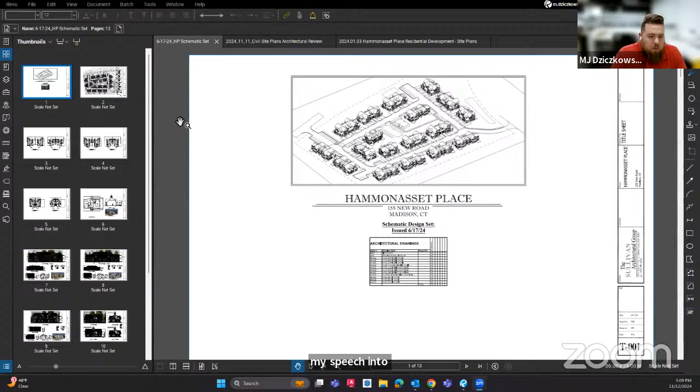As Marjorie has said, we are here to discuss 155 New Road in Madison, Connecticut. Tonight I would like to break down my speech into two sections: I'm going to start with the project scope and then go into the project aesthetic. To begin, this project consists of 18 two-story residential buildings and one one-story amenity clubhouse building.

As you can see, there are 9 residential buildings on each parcel, evenly spaced throughout the property. Each building is wood framed and will be set on a concrete slab-on-grade foundation.

As you can see in the site plan, there are different colored buildings. These colors correlate to a different scheme, which I will get to a little bit later when we are talking about the aesthetic.

The buildings are arranged on both sides of a vehicular loop to create a traditional neighborhood feel, with driveways in front of each building. There are 4 units in each of the 18 buildings, where the second floor stacks over the first floor, and the second floor is accessed by a walk-up stair from the grade level.

There are 2 unit types throughout the project: a 1-bedroom with a den, and a 2-bedroom with a den. We have arranged these to derive 3 different building types, each with their own aesthetic.

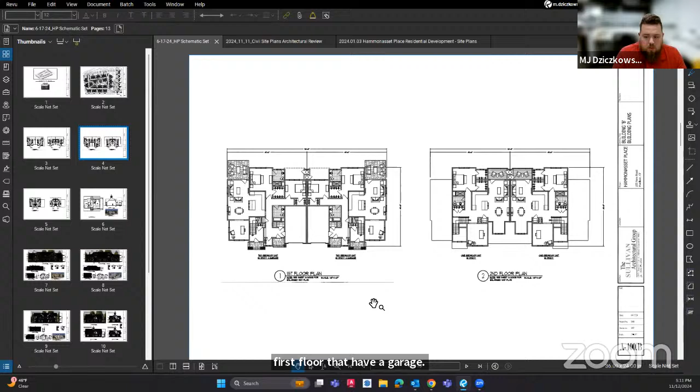And the last building type is building type C. This building consists of 4 one-bedroom units with a den, and they're paired. Each pair is stacked over one another with the garage on the ground floor.

With all of these buildings, the project is going to consist of 44 one-bedrooms and 28 two-bedrooms, and that will bring us to a total of 72 units with 100 bedrooms being offered.

The logic to the arrangement of these unit types and creating these buildings is to provide a variety of options to offer the tenants with different needs. This way, both one-bedroom and two-bedroom units are offered on the first floor with a garage, or offered on the second floor, which gives more privacy and a view.

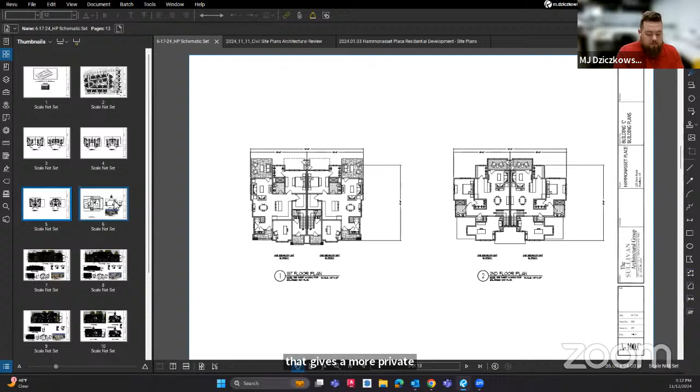And now I would like to get into the aesthetic of the buildings. The project has a New England coastal aesthetic using clapboard and shingle siding with various gabled roofs, with one- and two-story eaves to create a variety of scale and proportion, individualizing each building.

Building type A, as you can see on your screen right now, consists of clapboard siding with 2 color varieties, where 3 buildings will consist of this wheat, which is depicted, and 4 of the buildings will be this warm green color. Each color will have cream windows and trims and the weathered wood roof shingle. Each of the 7 buildings will have a dark brown shutter and dark brown entry doors and garage doors.

Each of these buildings also have, on the front and side elevation, a one-story bay with a dark brown standing seam roof. To get into the units, each entry door is recessed either under the second story, as you can see here, or under a roof line supported by trimmed columns.

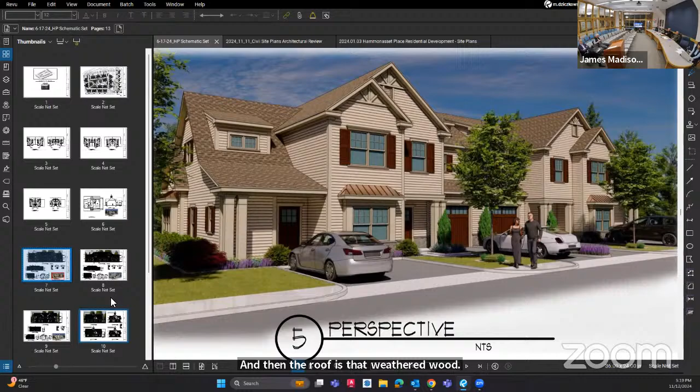So this particular color that we see here is not necessarily indicative of the cream? Yeah, I think this color is a bit more - the render could have a slight brightness to it that can make it look more like it's white, depending on how the sun hits it.

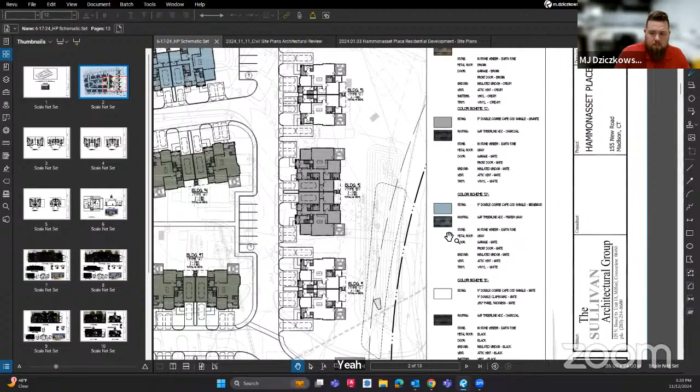Well, my comment is simply that the other color schemes, if I remember correctly, this is the only one with brown, right? Yes, so we have cream, green, gray, blue, and white. So the other 3 seem quite crisp to me and very pleasing. This one seems a bit on the dull side, and I wonder whether you might want to consider something to liven it up a bit.

Okay, like the others have white, and this has no white really, and white usually gives a crispness to the facades. And I worry that this looks dull. So, just a couple of quick observations.

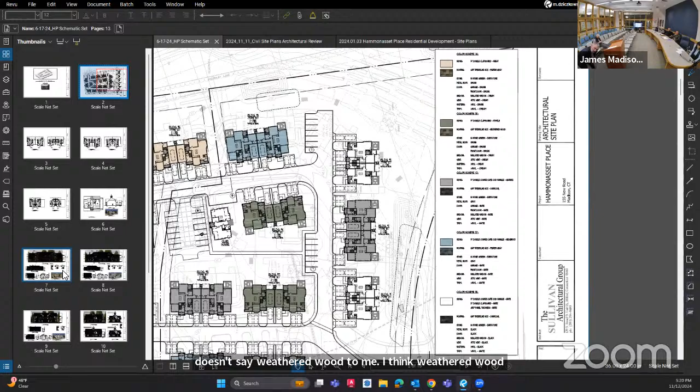I think the rendering, the 3-dimensional drawing you showed us, doesn't say weathered wood to me. I think weathered wood looks a lot nicer than that roof color on your rendering. Part of it's probably the way it's coming through on this particular monitor, because every screen will depict these things differently.

So if that's weathered wood, that will give you a bit of contrast to the others. It just looks like a dated color scheme to me, like that 1970s shingle, right? Correct, that's what I thought too. Which we don't use anymore typically. But if you're gonna use it, I'd rather see it blend.

This is Alex, just to echo what Ron just said, I'm glad you brought that up because that was my initial impression as well. And then it's only compounded - I think there's a bit of stone veneer on the front, if I'm not mistaken.

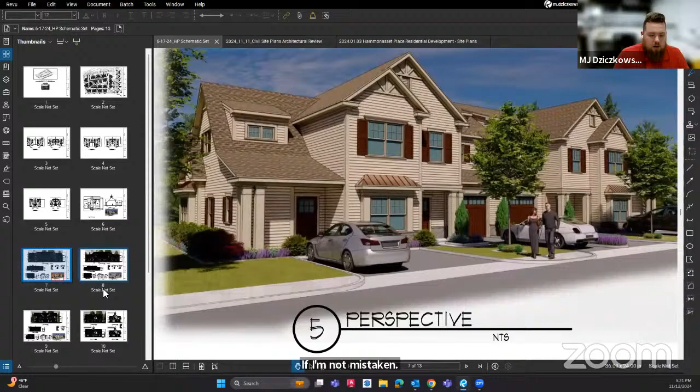Yes, there would be - I think we could see it in these elevations. So yeah, the bays will have some stone to them. And take this as an opinion, but it reads very 70s, and using stone that's not indigenous to the area always reminds me of something you'd see in Scottsdale, something that looks like it belongs in the desert but not really in a little coastal town. And I think the veneer gets echoed in some of the other units as well.

So I did a Google search to see what other towns have used along the shoreline, and it seems like a more cheerful granite or something more in keeping with what you'd find in your yard might tie this in and give it a sense of belonging. But I completely agree with Ron - it could just be the monitor, but it reads as very dark and 70s-ish, whereas the others read as coastal.

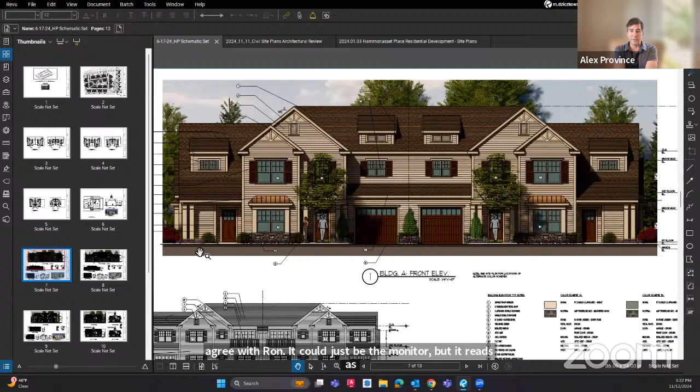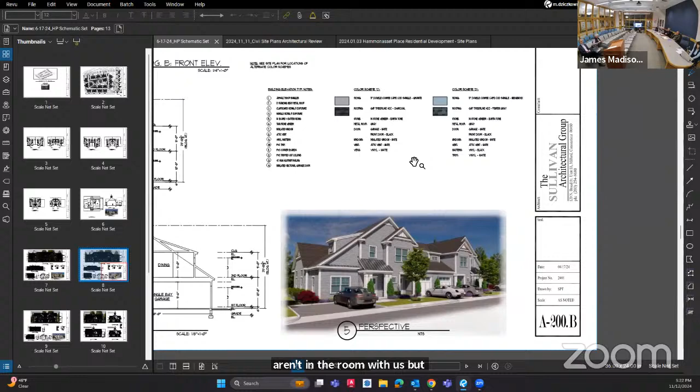I think the stone veneers are all over the map, and I don't know if you've specified anything. Typically what we'd like to do is see samples of all the materials, because then none of us are really guessing at the color, or what the lighting does to it in here. So I'm not saying we need you to do that necessarily, we'll discuss that probably at the end, but I think that would make the choices really clear where everybody can say yeah, that's great, or no, that shouldn't have been done. So anyway, one of the things John Cunningham just said to me, maybe you can recap it for us.

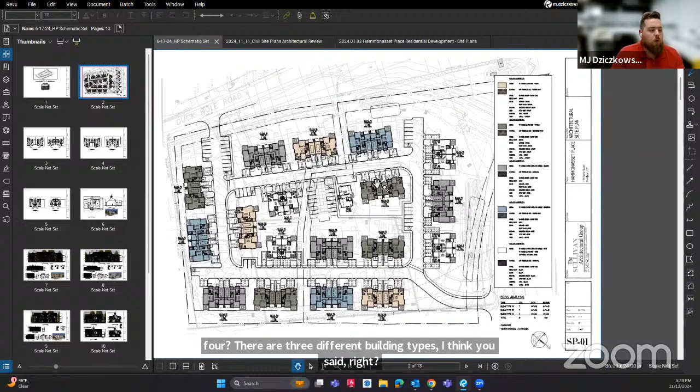Are there 4 color schemes in the entire complex? There are 3 different building types, I think you said, right? So 3 different building types, 5 different color schemes. Which building type do you have 2 color schemes for? Type A, okay, is that the one we just looked at? Yes. So type A is the cream and the green. Type B will be a gray or a light blue. And then type C is just white.

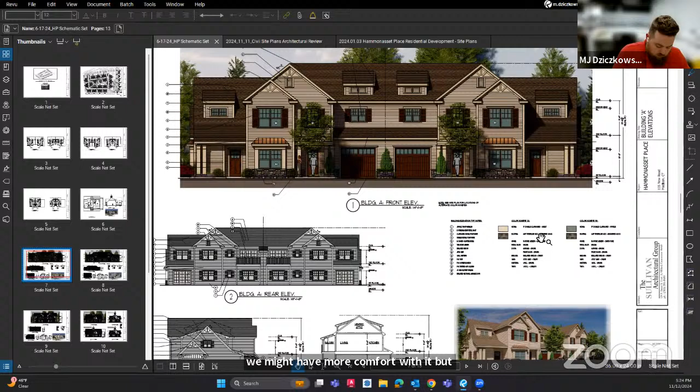So the cream or green on that type A building, looks like you don't have it rendered in the green, is that right? Yes, we only have it rendered as cream. But it's the cream that's the problem. I think if we could see that material sample we might have more comfort with it, but it just looks dated. Nowadays they'll use the term retro. Retro, well hardly, some retro. But I think overall the design of the building is fine. I think the other ones are a bit more creative, but I think this is okay.

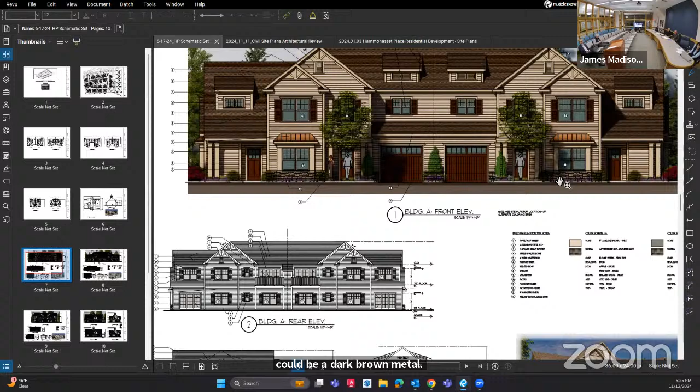Hey Matt, I guess the only thing I'd say along the lines of the visual palette here is that there's brown garage doors and then there's brown garage doors, and it really matters what door it is and what it actually looks like. So those are all just questions. The copper is rendered on that 2-dimensional elevation there, the metal roof looks like copper, is that the idea, it'll be a copper color painted metal roof? I believe so, let's see. Some of the doors, yeah, so we say brown, but right now it's rendered as copper, it could be a dark brown metal. I'm not asking you to change it, I actually think it's cheery compared to all the other brown, in my opinion. I don't think it's necessarily a bad thing, I just wondered if that was accurate in terms of the visual on it.

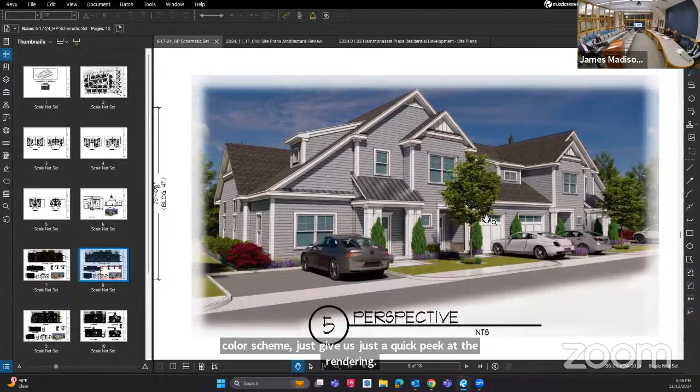Okay, why don't we just quickly run through the other buildings' color schemes, just give us a quick peek at the rendering. So here's type B. So this type would be in the gray and the light blue. And so these have the white trim, white windows, white doors, so it's a little more of a pop, and then it would have a dark gray roof. And then blue, is it just, I see the windows look kind of blue, or is that just a rendering technique for the glass?

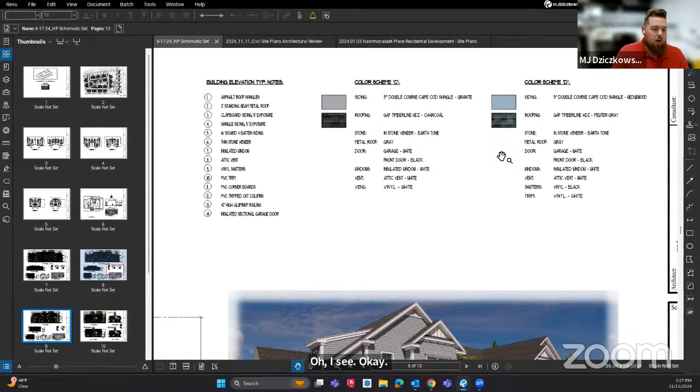It's on the screen, this looks gray to me. Oh, the siding? Yeah, oh sorry. So the siding is gray, and then there will be a light blue siding. Oh, so are there 2 color schemes for this building type? Yes. Oh, so that's depicted up here, okay, a gray and then a blue. And then like the previous building, only depicted right now is the gray.

Okay, and what's the specified roof on that? It looks like weathered wood to me, but maybe you mentioned. So the specified would be like a pewter gray, like a dark gray. I guess we're going to have to see samples. Yeah, sometimes when you do the gray roof with the gray building you get just too grayed out, in my opinion. I actually like the way that roof contrasts and emphasizes all the nice building forms you've done, because it contrasts nicely with the siding color in that drawing.

Okay, one thing to point out, this is Alex here, Matt, curious to get your architectural opinion. This house does not have shutters, whereas the brown one before had the plastic shutters that wouldn't cover the window if it were closed, which is always an annoyance to me. Does anyone else have a strong opinion? Whereas this seems so pleasing without shutters, is anyone else sensitive to that? I think it looks fine to me with shutters or without shutters, but if you could just pan us up to your 2D elevation, Michael.

Yeah, I think that's fine. The building has some nice form to it and it doesn't need the shutters. In fact, shutters in a lot of places on this building might look crowded. No, I'm saying the opposite - it looks good without shutters. Is there a way to remove shutters altogether? If they're not going to actually cover the windows, even in theory, that to me always looks cheap.

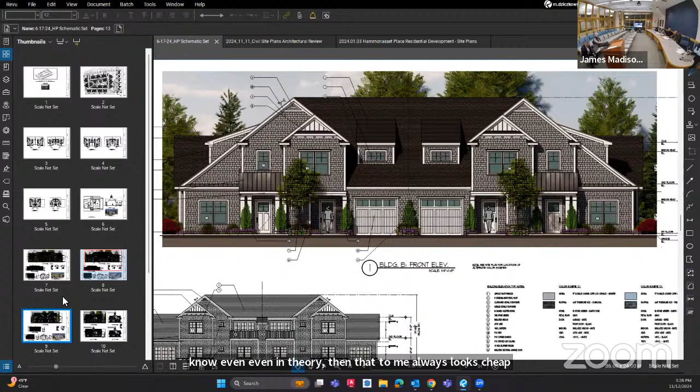This unit does not have shutters and looks terrific. Yeah, I guess we'd have to go back to look at that. Can we go back to the brown one and take a quick look?

It's not... I think it's very plain. You've got those small windows in the middle and those are really kind of lost there without some dressing, only 4 windows. But personally, I don't think that the shutters either make or break the building.

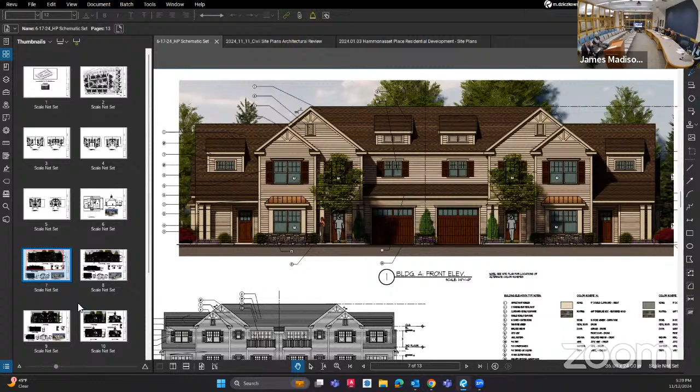I still think it's the color scheme that's the problem. Yeah, I would say that's probably more the thing that you notice. So it sounds like that building needs to be reworked, possibly with the color scheme, or if he can show us the green scheme, maybe we get rid of this color scheme altogether, if they would be amenable to that.

Okay, and then here is building type C. Looks great. So that looks like almost the same building we just saw, but different color, or am I wrong about that? I guess I'm wrong, it's different. But it's actually very nice, I think it's great.

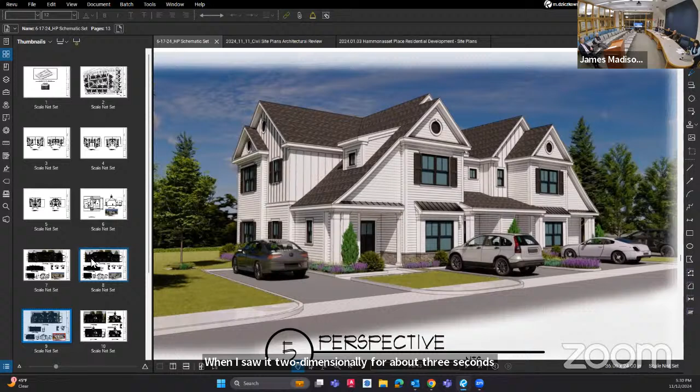This building's a little more compact, strictly the 1-bedroom units, so it's not as wide as type A and B. Well, I think with white you can get away with mixing that vertical board and batten and the shingle, and when I saw it 2-dimensionally for about 3 seconds on my screen this week, it looked good. I thought it was pretty successful. I like the contrast that roof gives to the white - you'll have contrast there with white, obviously.

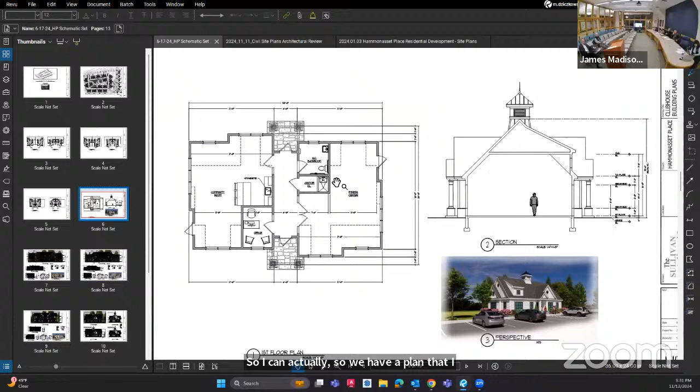Okay, and then lastly, this is the clubhouse. So the clubhouse will have a similar aesthetic to building type C. What's in the clubhouse, what do you imagine going in there? So we have a plan I didn't hit on - a community room, then a fitness center, an office space, and then a bathroom for the clubhouse itself.

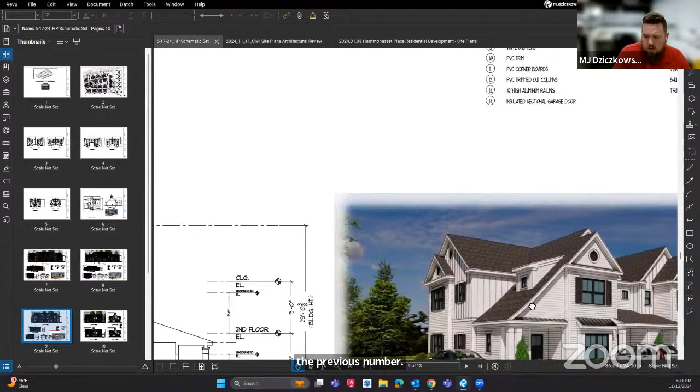And then here's another render. Well, it's a different color. Yes, this roof looks like it does not look as dark as the other one. But it would be black like the previous render. Was the other rendering white as well? No, the other clubhouse - oh, sorry.

Yeah, that one. That's the same white? Yes. It's got a shingle side - shake side. So would it have shake siding or not? Does it not? Oh, it does not. I'm sorry about that.

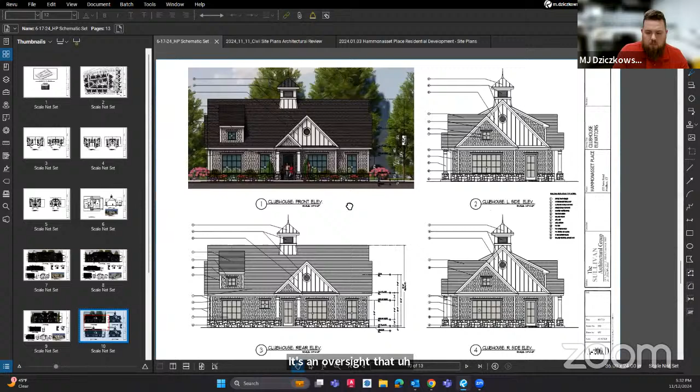That I am not aware of. I'd have to... my assumption is that what is in the elevation is the intent, and it's an oversight that was not matched in the rendering. Sorry about that. The three-dimensional rendering was all that.

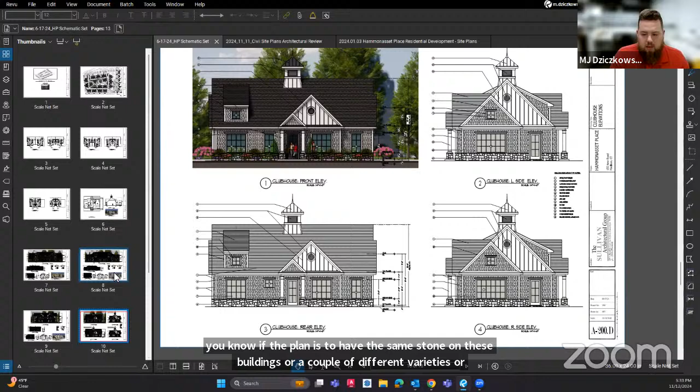Okay, just back to the stone - do you know if the plan is to have the same stone on these buildings, or a couple of different varieties? I think when we laid it out, we have them labeled as earth tones. My thought is that it's all the same, but like you said, it can be discussed to kind of match a granite with this gray and blue scheme instead of the earth tone, and kind of bring it back to Madison as brought up by another member of the board. So I feel that could be a discussion to change up the stone.

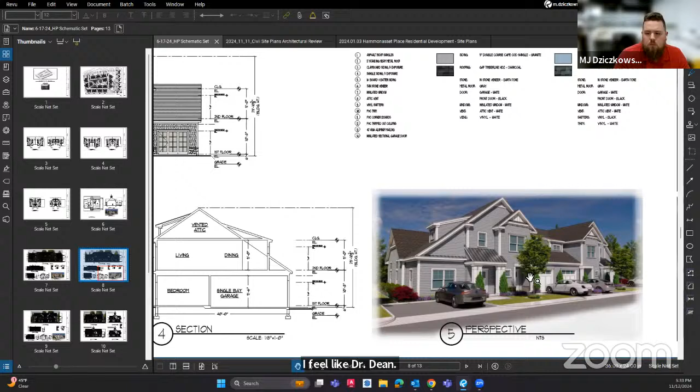These are for sale units, right? Is this a condo thing? I thought these were all going to be rental. Mr. DeGennaro may be able to better answer that. I'm not aware of for-sale plans. The plan is to rent them.

After we got our first approval, we probably had 15 to 20 people from Madison asking for a rental type community. Most of them were older people who wanted to maybe sell their house in Madison but still have some connection and still live here.

The only reason I ask is I know that what looks like sort of a baby blue, powder blue on my screen - none of my developer clients would ever let me use that, because it's hard to sell. So that's why I asked, but I'm not saying I don't like it.

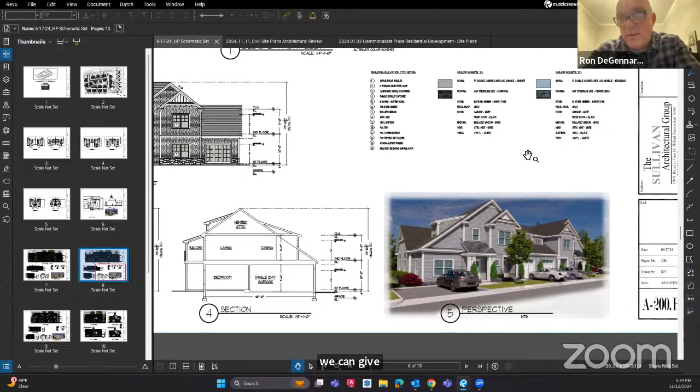Again, if we had that material in front of us, we could give you better feedback. As a builder, of course, I wanted to make them all the same color, but the architects talked me out of it. Good for them. Yeah, I like it, I like it.

Looks like, I think for a rental community, it's perhaps a better way to go. I think it makes it more lively. Are we going to move on to the site plan?

Before we leave this - I don't want to belabor it, Michael - could we just go back to your initial site plan with the color coding? So along the road, is that new road to the left or bottom, is that the way it goes? Where's New Road?

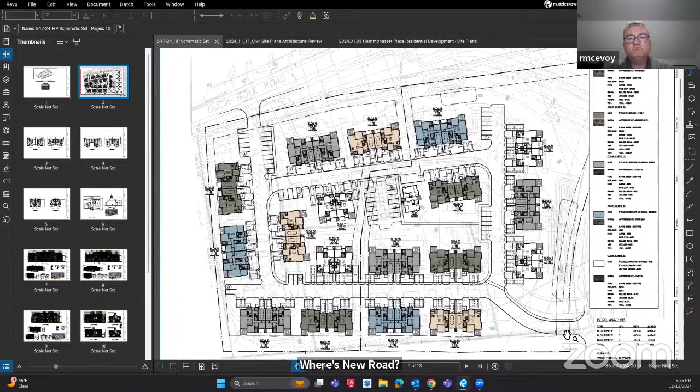New Road is to the right. Where is it? Oh, I see, Duck Hole is at top. Duck Hole is on the top. Is north left? If there was a north arrow here that I could see, there probably is one - it would be pointing to the left. Or sort of, okay, whatever. So anyway, Duck Hole is up at top.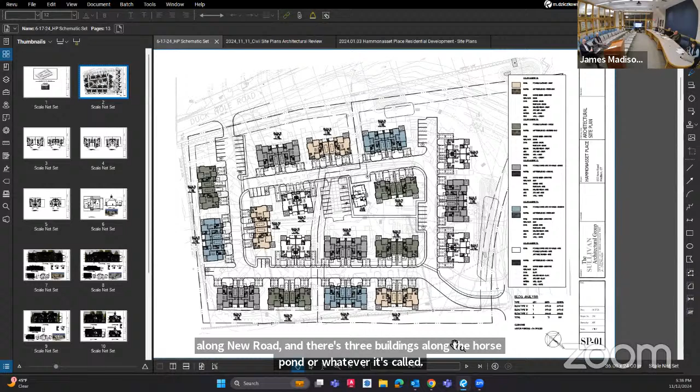Okay, New Road. So there are 3 buildings along New Road and 3 buildings along Horse Pond, or whatever it's called. And so the colors of those buildings - are all 6 of them different? Can you just walk us through what the colors are for those 6 buildings, so people can drive by?

So this is building 3, it's a type C, so it will be white. This building is a type B, so it has the gray or blue option - we chose this building to be gray. And then this is another type C, so this building will be white. So white, gray, white, that's nice. And then when we come down here, we have a type A. When we get to this road, we have a type A on the inside and a type A on the bottom.

So you don't need to - I'm sorry to interrupt, but unfortunately we're on a time limit tonight. If you could just walk us through the stuff that's along the public way on top of the site plan. Oh, sorry, yes. Those 3, that's what people are really going to see in town, so that's what we're sort of supposed to be focused on from our perspective.

So this building is a type B, so this will be the light blue. Next to that is a type A, which will be the cream. And then next to that is another type B, so it will be gray.

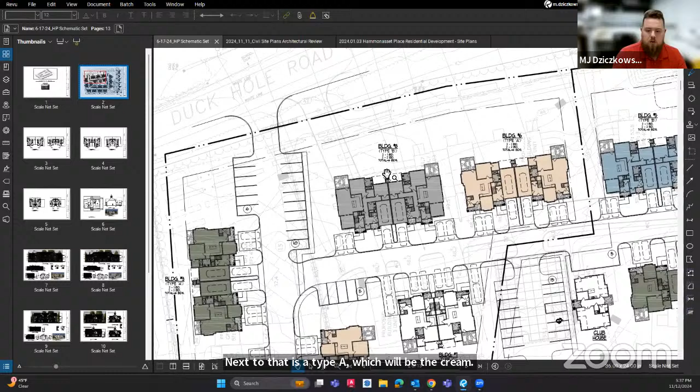So that cream could go green, right? Then we'd have blue, green, gray - that might be a little much. It could go green, then I would probably change this building to cream. Anybody have any strong opinions about what this looks like on the road?

Definitely - okay, go ahead, please speak. Well, I agree with you completely. I think blue, cream - unless it gets changed, which I hope it does - blue, cream, or green and gray is pretty heavy all together. I think the whiter colors look more elegant, in my opinion.

This is going to be, to Matt's point, where people on Facebook and in town, once this gets going, are going to start noticing, and their ears will perk up and everyone will be interested. So to Matt's point, I think New Road and Duck Hole Road need to really look terrific because that's what the public's going to see.

Thanks for the geography there, Alex. I needed it, it's a weird name. I still call it Horse Pond.

As this is preliminary, we can worry about this at some other time, as long as the color schemes of each building is acceptable. Juggling the colors and where they go is just sort of... I just don't think the blue is going to play well on that primary corner where everybody's going to see it.

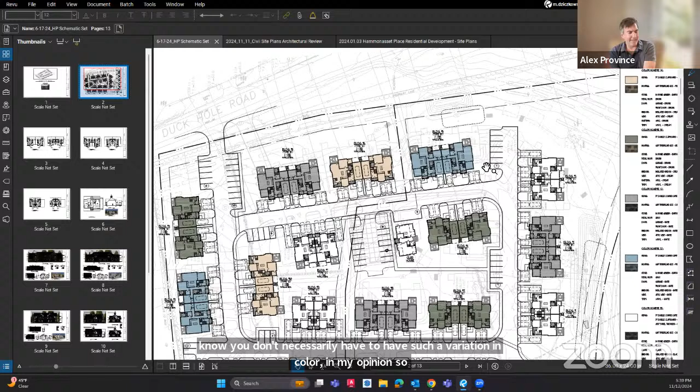I think John hit the nail on the head. Four colors in the grays and the whites. Okay, I don't have anything else. No, let's get let's move on to the site.

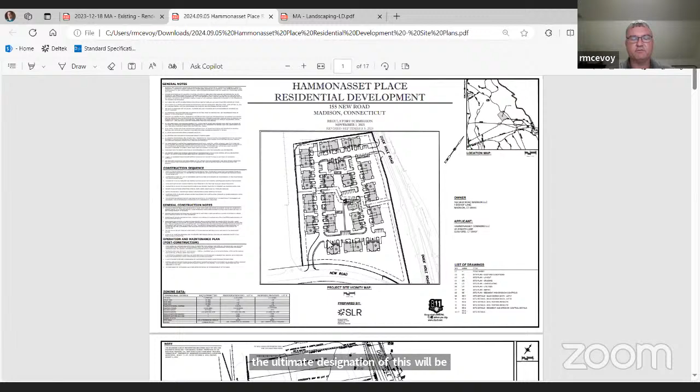And just a little more detail in the layout. We do have sufficient parking for each building, either in the form of a garage space or surface spaces immediately adjacent to the building. And there are a number of visitor spaces as well, some concentrated around the clubhouse, some located in clusters of 3, 4, or 5 surface spaces throughout the site.

In terms of site utilities, not going into any significant detail, but these will all be on septic systems. As you're all aware, there's no sewers in Madison, and the soil testing proved to be very favorable, located along the eastern side of the property. So most of the leaching fields will be directed towards the east side of the site.

Stormwater will be collected and conveyed and brought to an underground stormwater basin located near the clubhouse, underneath the parking lot for the clubhouse. There will be 2 smaller surface ponds located in the south and southeast corner of the site. The southeast corner will be the ultimate discharge, which is also the lowest portion of the property.

In terms of the road grades themselves, this is relatively flat. Most of the driveway grades or road grades as you go around this will be 3% or less, so it will have a relatively flat feel and not a significant amount of topography. The only area with some grade change is in the northern portion, where we're up at roughly 5%.

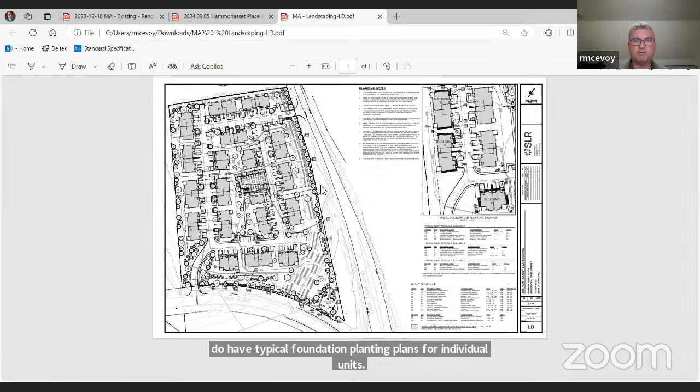Along Duck Hole Road to the east, we have a series of evergreen buffer plantings located along the property line. There is a fair amount of vegetation right now within a very large right-of-way on the west side of Duck Hole Road. There are some overhead utilities, but there's a pretty wide swath of state right-of-way between the edge of pavement and the property line itself, so that buffer will be maintained. There's no intent to cut down any trees within the Duck Hole Road right-of-way, with the exception of our emergency access drive.

But largely, regarding our leaching fields, we are proposing evergreen buffer plantings along Duck Hole. Similarly, along the commercial property to the west, we do have buffer plantings as well, generally evergreen in nature. And along the south side, we have a series of more shade trees, not the evergreen buffer that we had on Duck Hole Road. But again, the intent of this layout is to provide adequate ornamental and shade trees within the internal roadway network, and screening along the east and west sides of the property, with a variety of shade trees along New Road itself.

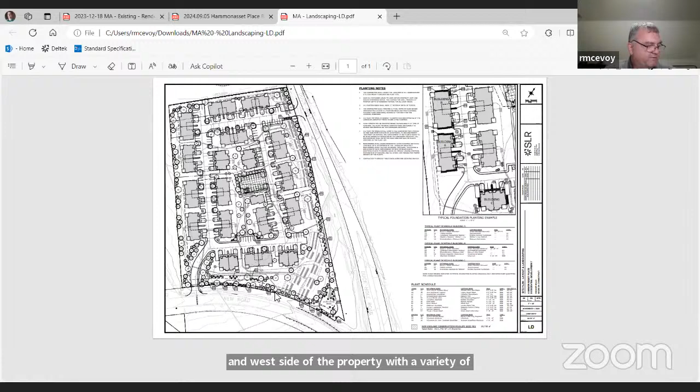I do have Sheba from my office, who is a landscape designer, and she could go into any more detail and answer any questions you have about our species selection, if you do have any questions regarding that.

No, I looked at the plant list. I think the plant list for the entire site looks fine to me. I have a couple little suggestions I made, I went through it today. I see you have straight Clethra alnifolia in your foundation plantings. I would just suggest maybe going to one of the dwarf varieties, like 16 Candles, or one of the smaller varieties. I think you'll have a much easier time than trying to contain straight Clethra. Sure, not a big change. A really good suggestion, actually.

Also, even though I'm a big fan of sugar maple, they're having a real hard time down here — they need cold winters. So I see you have red maple on the plan. Maybe just move all the maples to red maple and delete the sugar maple. Sure, which I think long-term might be better — they're hardier.

Everything else looked fine, I went through all the plants. Majority of them are native. You have a range of evergreen stuff along Horse Pond, which I like also. I worked on the property across the street from here — it's a lot of the same material I'm using over at the new office building. Okay, great, awesome, thank you.

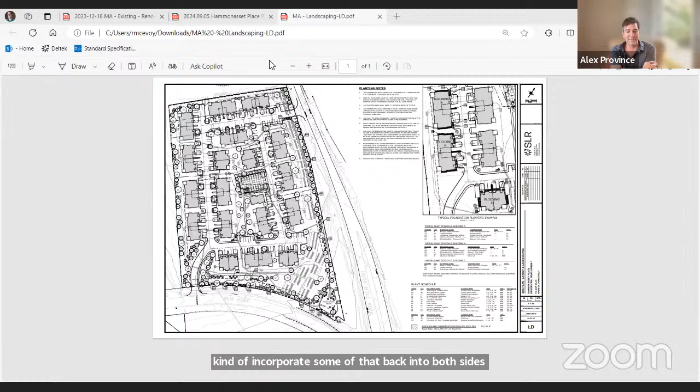John, can I follow up on that? Remember across the street, historically, there was always — you can specify just a lot of cedar. I don't know which varietal you would know, but it seemed like since I was here as a kid, there's always been like a specific kind of cedar that's grown in these fields. Does it make sense to incorporate some of that back into both sides? There is red cedar — they have red cedar on their landscape plan. When I asked about the landscape plan, I did not see one, so I missed out on it, my mistake. Eastern red cedar — yeah, Eastern red cedar is what we're using across the street. It's native to this region, and they have it incorporated in their landscape plan, which I think is a good choice.

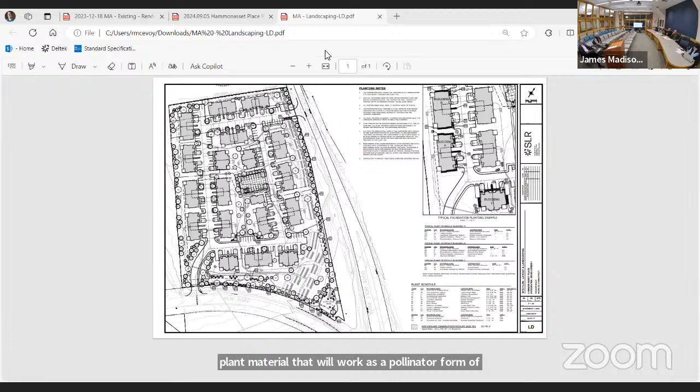That's great. And across the street, you would put in a pollinator meadow. Now we crossed that out from across the street. You crossed it out? Yeah. Oh good, I'm just fooling you. No, it was good — all of their stuff is fine on the plan, and they have plant material that will work as a pollinator form of shrub material. I didn't really look at their perennial list, but I'm sure it's going to be fine. Okay, thank you John, okay.

So you are kidding. Yeah.

I have one observation, I don't know how other members see this. In your upgrade from 42 units to 70 some units, that's quite a significant increase. And while that's a noble effort to include more housing units in Madison, I think it's crammed this site full of hardscape and houses, and really leaves almost no green space within the development. It's only on the outside where you see some green space, and that's not a whole lot either for people to use and be comfortable with.

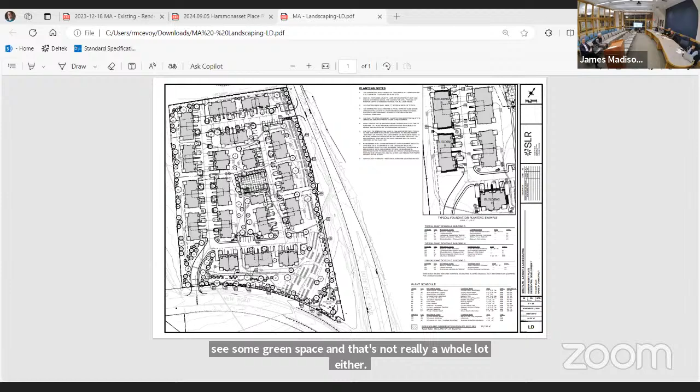I think once you're in here, because this is going to be a one-way 360-degree road, right? Not two ways? It'll be two ways. Okay, well then that makes it even wider. So the cars, garages, entryways, and buildings, even though they're quite nicely designed, I think it'll all be in your face in a way if you live there. I'm just concerned that there are too many buildings jammed in. I don't know how other people feel about it.

It's a good point, I think there's a lot of density there. If you're able to zoom in on that site plan we're looking at right now, it might help us get a better feel for it.

So where the backs of those two buildings in the center are facing each other, that looks like it's probably 100 feet between those two buildings. Yeah, this is close to 100. You're probably more like 50, 40 to 50 further to the left on the south side.

Well, the entrance side is where it can get a little congested. So how deep are your parking spots in front of your garage doors? Just to give us a sense. We have a minimum of 22 feet between the garage face and the actual driveway.

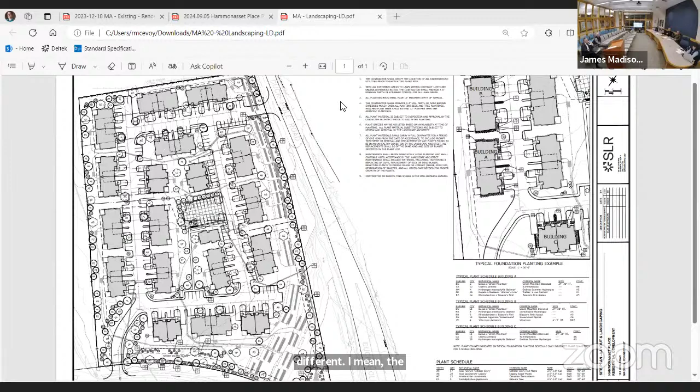Alex, I think landscaping is landscaping, design and planning is sort of different. So it's not just that they want X number of units, and that may not be appropriate from a design and layout point of view. So who's responsible for creating the layout so it flows and isn't crammed? Well, it depends on the specific design team and the roles and areas of expertise of the different players, Alex.

But what I think is important and what our charge is, is the fact that it's really tight once you drive in there, as an aesthetic concern from the outside looking in. Because remember, our view from the public way is primarily what we're supposed to be focused on. Now, planning and zoning may look at it and say this is a lot of density, and they may comment, though I'm not sure if they can decide based on the regulation that it's too much.

I think that when I look at the buildings, this is a good test. If you look right along New Road, you've got these two-unit buildings. I don't know how long those buildings are. That building's probably 60 to 70 feet long, I'm guessing.

And then the center building is probably 80 or 90, I'm not sure, but the proportions of those buildings aren't objectionable from the street. I think what the developer really benefits from here is all the excess right-of-way frontage he's got along Duck Hole, and he's got some good buffer there to New Road.

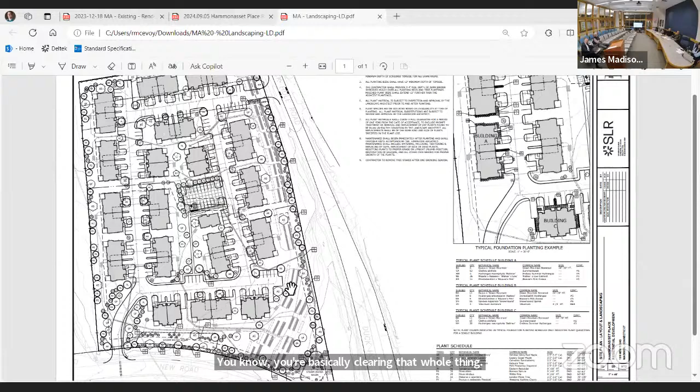Right, so you're basically clearing that whole thing. What happens along the very perimeter is important because they're going to need to reestablish some stuff. And if you're doing all that leaching there, you're regrading, I would assume.

Limited, we do have some regrading. The leaching fields are located in areas where it's sand and gravel, which is nice. Otherwise we wouldn't be able to have the density on this property if the soil conditions weren't appropriate for that.

We do have a substantial area just by virtue topographically, by virtue of the soil conditions, septic, stormwater, that the intersection of Duck Hole and New Road is several hundred feet from your first unit. So I think that's what makes me less concerned about what it's like internally.

That's my opinion. Just one really quick question, I know we've got to move on or we'll get tossed out of here. One last question though, on that corner, where it drains down, is that not going to be a meadow or something that looks natural, that doesn't look like a city?

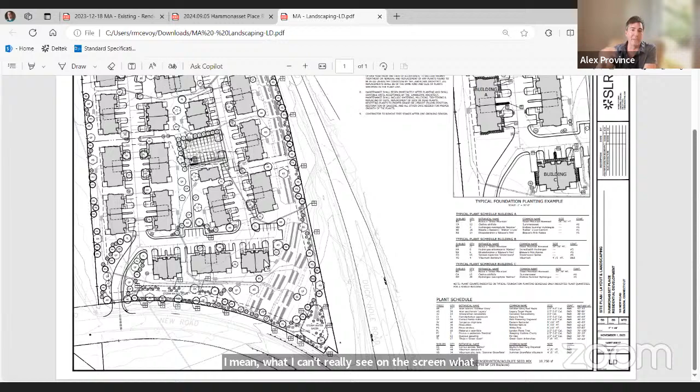I can't really see on the screen what's on top of the leaching fields, is that lawn, or will that be meadow? That'll be lawn. Unfortunately we have to be a little careful about how close we plant trees to leaching fields naturally.

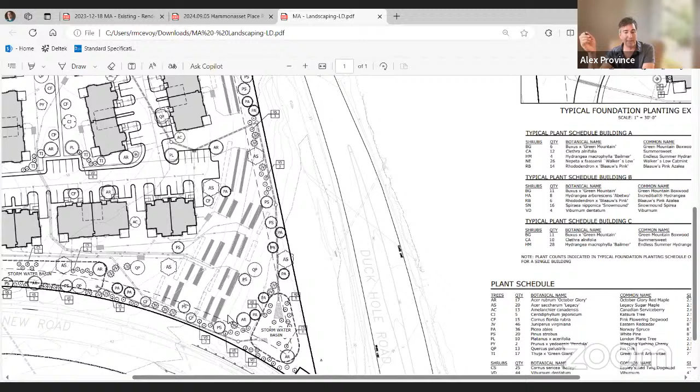So my suggestion, if that is going to be lawn, is instead of going with fertilized, green, artificial-looking stuff, turn it into something that's mowed several times a year but allowed to have a natural look, and planted with wildflowers or something for pollinators, whatever the current term for that is today.

That's a fair comment. Yeah, I think as much vegetation as you can put there. I don't know anything about what tree or how big it is initially, but one day it would be nice.

I would think that corner would grow in around that detention area, maybe between there and the leaching, and you'd get some nice big shade trees in there, maybe some understory that would help buffer it. That's what we're looking to provide.

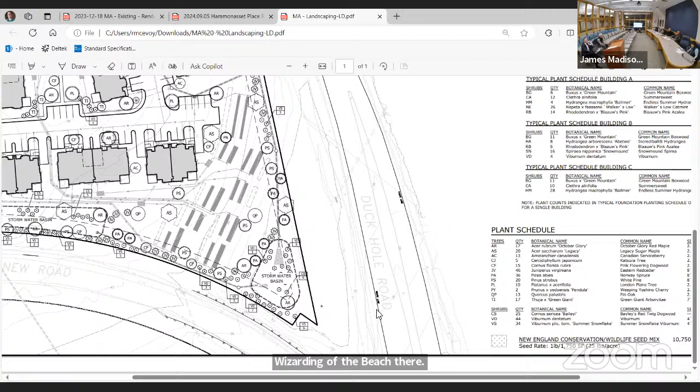When I think about our aesthetic critique of anything, I do put this a little bit in perspective. You've got basically tens of thousands of people going by on the way to visit the beach there, and I don't think it's really going to be noticed. I've crossed that section almost every day for many decades now.

But I still can't remember the name of that road, but still. That's right, now I do. Yeah.

I don't think the average person coming down to the beach is going to be all that concerned about it, but we do have a very large distance from this intersection, which is a pretty busy part of town coming from Clinton. People are probably going by there 40, 50 miles an hour, maybe even faster, and it's very different from most of the reviews we're required to do.

So it's just a different kind of site. When you look down again towards this intersection, you're hundreds of feet away from Duck Hole. And as we get a little bit closer further up, Duck Hole starts to tighten up to the right-of-way line, the actual paved portion of the road.

You're still looking at well over 100 feet to the nearest unit, with existing vegetation within the very wide shoulder of the road, supplemented with screening planting. So again, these units along Duck Hole, I'm not gonna say they're not gonna be visible from the road, but they're gonna be somewhat removed.

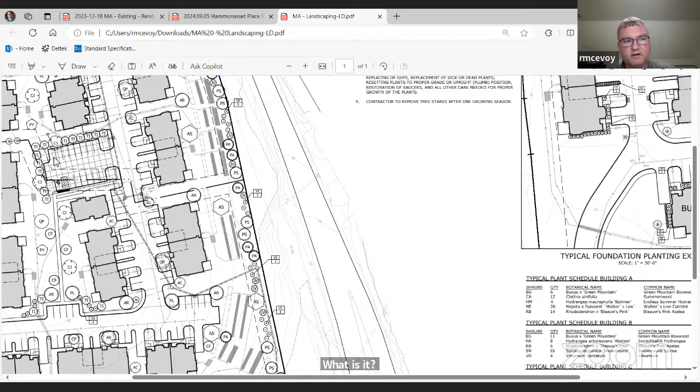I still don't understand what that crosshatch section is. The clubhouse is next to it, in gray. This right here? Oh, this represents an underground stormwater drainage system beneath the parking lot, near the stretch of the cars. Is that a parking lot? Yes.

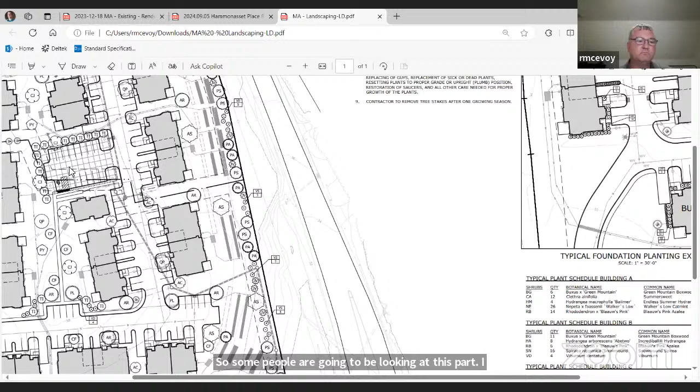I suppose the one thing we should have been looking at more so than the fronts of these buildings is the back, because that's what we're gonna see. So some people are gonna be looking at this part. This parking lot's gonna be in the center of this development? That's correct, and we have it surrounded with arborvitaes and screening plantings from the units. The whole hardscape, the entire thing, is paved.

Matt, do they come back in front of us again? This is just a preliminary, so we can ask about lighting and all this. This is not a preliminary review, is it, Maria? No, this is the application, and I was just looking on the agenda to see when the public hearing is. The public hearing is tabled to November 21st.

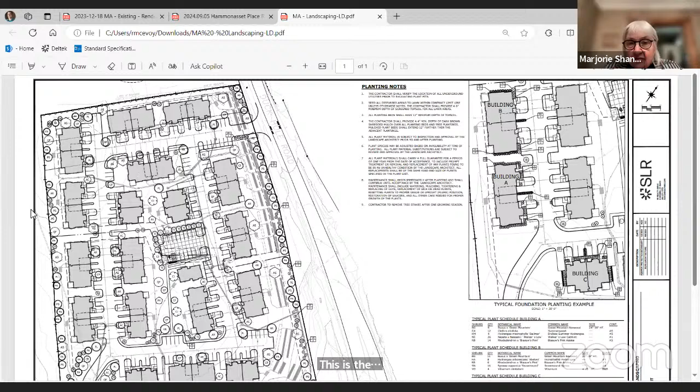So we're not gonna see you? It starts on the 21st, so you can see them in the beginning of December again. This is Marjorie Shansky, for clarification: this is a site plan review.

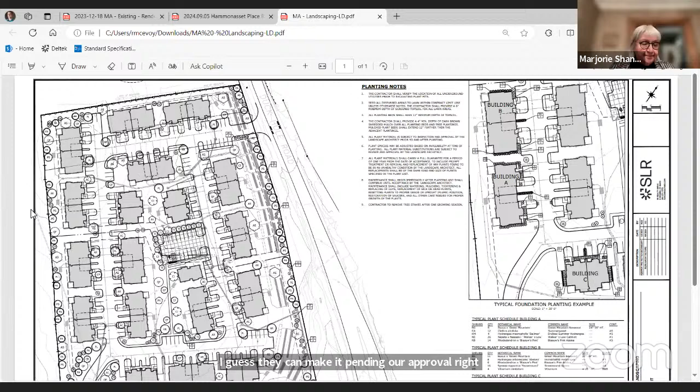So it's a site plan, it could be heard and decided in the same night? No, there is no public hearing for that, it could be. Okay, but if we, for instance, want to see samples of the building material and the actual colors, can that happen? Yeah, you can, and it would be pending our approval. That can still happen, as opposed to many other things.

So when would that happen though? Given the shortness of time for today's meeting, I don't feel comfortable that we've covered everything that we should have. So that would be the December meeting. Not to be a jerk, I like what you guys are doing, but I just want to make sure I'm doing what I should. December 10th is the next meeting. So we'll see you guys in December again.

If they're gonna come back, yeah, we gotta look a little bit at the back of the buildings, and we need to see building samples. Yeah, we need to see materials.

Unfortunately, the media doesn't give us a sense of that at all, really, what the colors are. That's something they can have somebody bring in December, even if it's Mr. DeGennaro—building samples. I'm sure we can take care of that.

And what about light poles? We're gonna have to unfortunately talk about that in December, if we're gonna see it again. We still have another application and we're being thrown out of the room at 6:30 for a public hearing, so just saying, for the next meeting. Yeah, unfortunately we didn't get to cover that.

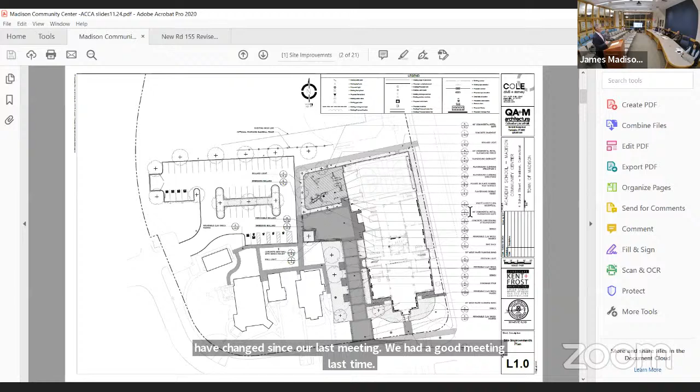Because we're on a short time frame, I guess what I'd like to do is point out the things that have changed since our last meeting. We had a good meeting last time, you made some solid recommendations. So maybe, Brian, if you want to talk about the site work and the things that have changed, and then when we get to the building, I can talk about the things that have changed.

Okay, well, so there's been just some minor tweaks to the site plan that were required by some of the subsurface infrastructure that has been refined, and mainly it's been the septic system requirements that have required more of the paving to become pavers, so that it can be removed in case any of the septic system needs to be worked on later. And the walkways around your smaller existing buildings were previously shown as concrete for budget and simplicity, but they've been changed to pavers, so it increases the distribution of the brick paving through more of the site, which we think is a benefit.

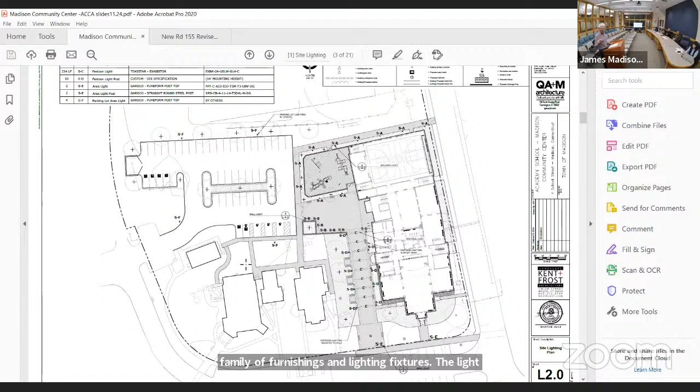So on this plan, we have our lighting, and your comments about some of the lighting fixtures and other appurtenances, like the furnishings of the site, had to do with them really being kind of an eclectic mix, and some of them had more of a historic style to them. What was recommended was that we look at trying to unify the furnishings and the light fixtures so that they represent the contemporary period, which is today. So we've done that, and now we have more of a uniform family of furnishings and lighting fixtures. The light sources are all LEDs, they're all dark sky compliant, and most of the site lighting is kind of low level anyway, with the exception of where we have to have higher lights around the parking lot, for example.

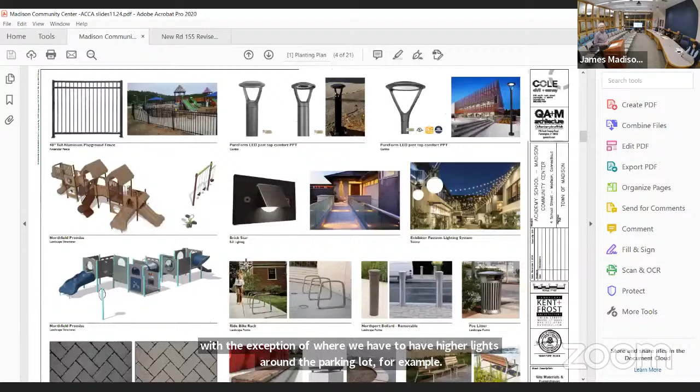Do you have examples of the front? Yeah, we do, we're getting to that. Go back one? Yeah, that'll be my last slide.

As far as planting is concerned, there's really been no change. We had to tweak this center rain garden in the parking lot, we had to make it slightly smaller, I think it's 3 feet narrower because of the septic system adjustment. Otherwise, it's the same plant list that you reviewed previously. It's mostly native plants, they're very tolerant. Drought tolerance is important, as we're all thinking about lately.

Can I make one suggestion? Sure. I think it's in the basin plan, I see you had multi-stem river birch.

Okay, can I just make a suggestion? I haven't used multi-stem in 15 years, it's a big grower. Those multi-stems want light in each stem, so if you look at a tree that's 15 years old, it's extremely large. No, I agree, they'll spread too far - that's more of a landscape computer program issue. If you went to single stem, same caliper size, rest of plant material is all great, it'll stay in bounds with that level.

Okay, this is my last slide. So these are furnishings - starting at the top, it's that simple black ornamental aluminum fence around the playground.

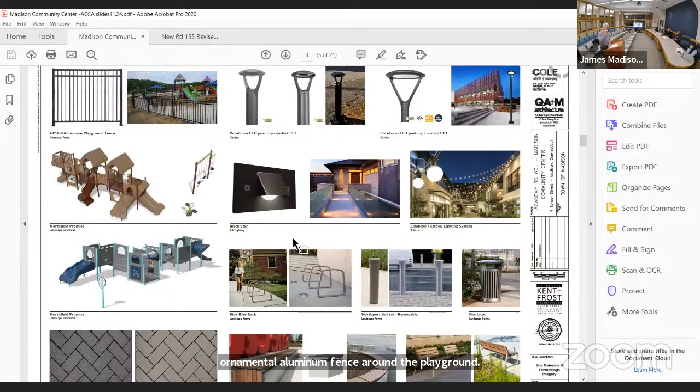And this is where we change now - the bollard is part of the lighting family that matches the area light. The next light is the one in the parking lot, and then there are two out on the post road side of the walkway. They're all by Gardco company, the Pure Form line, so they all match.

These bollards are terrific - they have no glare whatsoever, they cast the light down onto the walkways and they look great. The other lighting, we have some seat wall lights - the photo gives you an idea of what the light pattern on the pavement looks like. And then we have the festoon lights over the linear walkway.

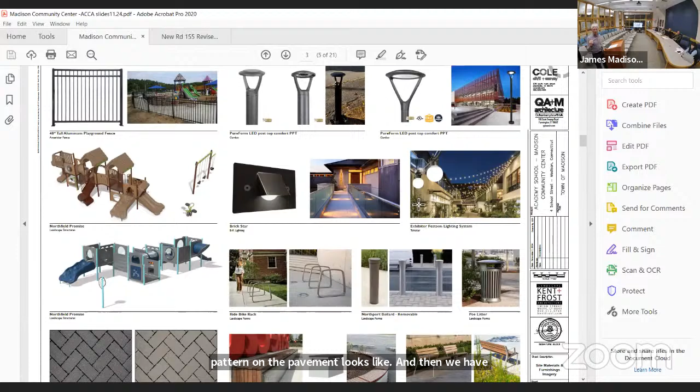The other furnishings on the site are bollards, trash receptacles - it's touchy, I know - and bike rack, benches, and then there's a seat wall top made out of a prefabricated wooden material system, so that concrete wall around the central tree is comfortable to sit on.

And we've changed all the benches. One of the oversights was that some of the renderings you guys saw last time had template furnishings put in that didn't really represent what we specified. So what we've specified is a more contemporary style for all of those things.

Playground equipment is just kind of standard modular - I don't think we had any comments on that, but we did have comments about pavers. We talked about whether they'd be concrete pavers, red brick pavers, or another type of clay paver. The consensus of your committee was let's find a more gray-tone clay paver, because clay in general holds its color much better than concrete - concrete pavers tend to fade over years.

So we spent a fair amount of time talking to different distributors and sources, and I have a few samples here. This is what we propose for the general field of the pavers - these are clay brick, not stacking modular. This is what we're proposing for the accent, that would be sided. And this is a permeable paver sample, it's got the lugs, so they'd sit about a quarter inch apart, and that joint allows stormwater to infiltrate. The areas where these are being set are very flat, so we don't really have pitch for drains - we don't really want drains anyway - so it'll allow stormwater that falls between the building and parking lots to be absorbed.

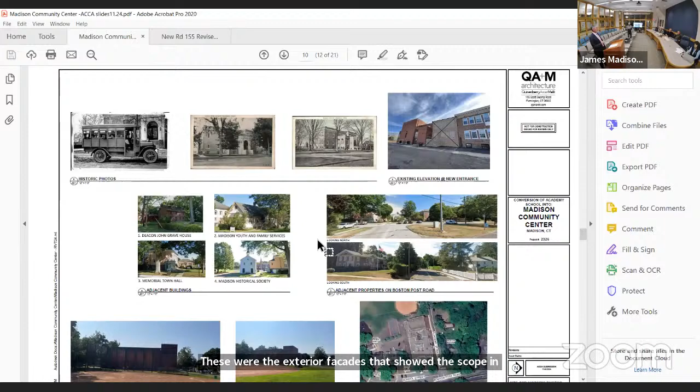These were the exterior facades that showed the scope in the demo. We can go by this. The scope hasn't changed, we are restoring the exterior of the building, all the masonry, and replacing all the windows in kind. I did bring some samples of the window that we're specifying tonight.

Which is the Marvin, that's great. So we are going to use the Marvin clad wood historic series window, and then they have casing shapes that we can match to the existing shapes, not the same color though, we're going with the white color. But what we did change on the exterior of the building is we changed the connector to be a dark bronze, very similar to what you experienced with the other architect. Sometimes it's difficult for us to get the exact color to show, but it's going to be a dark bronze, and it will match all of the exterior amenities as well.

We removed the signage from the canopy, and we've actually just put a small sign on the facade of the building so that it can be seen as you approach the site. Do you have a full-on shot of that new entryway and how that goes? Here? Yeah, a close-up. This is as close as I have for you this evening.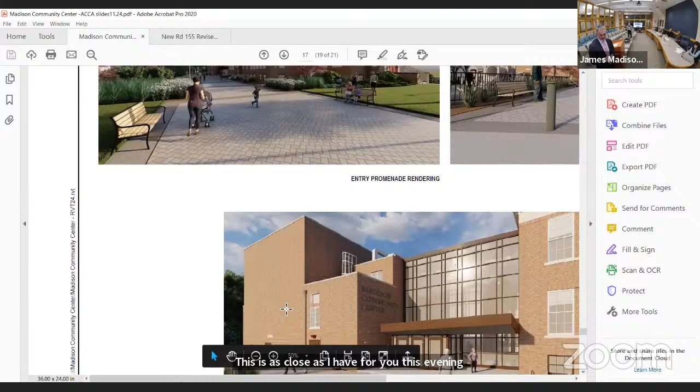Can you describe how the doors and how that works down there? It's not straight across, oh so this is a bump out. The vestibule is actually outside of the curtain wall, because there's not a lot of room on the inside, but it all sits under the awning. So you walk in there first and then you walk into the building? Yeah, so if we go back to the floor plan.

Maybe you can see that. Keep going back, the plan should be back a little bit. I'm going the wrong way. I'm sorry, go back a slide or two. I don't know if that's...

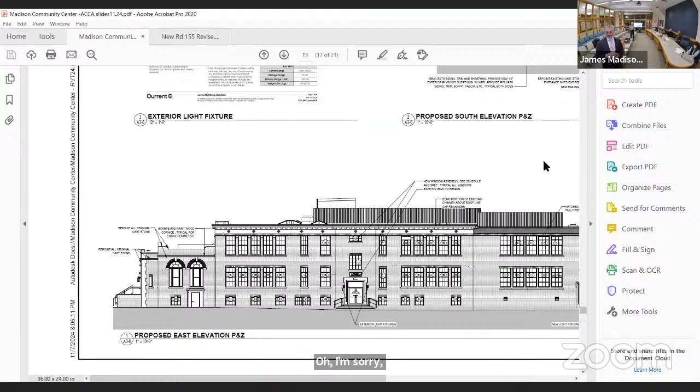But Tom, this is what you reworked, I think, right? Where you had it in white and something. Originally we had it in white, or anodized aluminum, and you guys recommended the dark bronze, and I was against it personally, but I like the dark bronze in the sense that it will now sort of be more demure, and it will let the original historic building stand stronger. It's not competing with it. So I do like it.

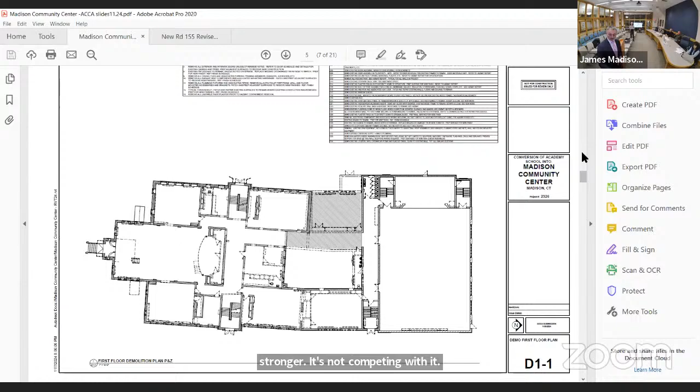Oh, where's the new floor plan? Maybe keep going the same way you're going. Again, another one, maybe one more. We don't have the new floor plan in here. Keep going, please hold, I have another one. Hold on.

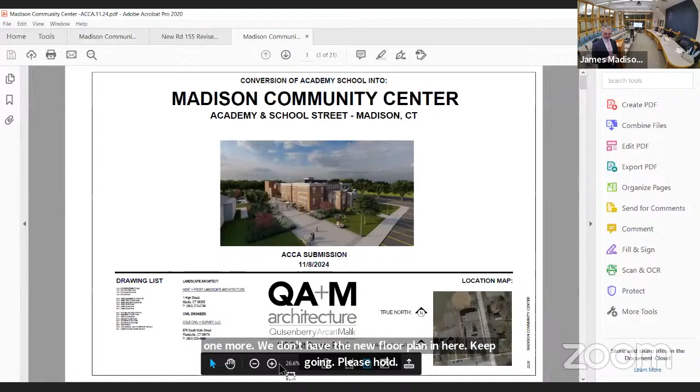This is a different one. So there's no floor plan showing us the entryway? The entryway, we presented it last time, maybe let's keep going a little more. That was a street. Oh, here. One more, maybe one more.

Okay, here's the floor plan. So you can see that the vestibule, that glass bump out, is the... Yeah, I'm already on it. Look at me. Oh, I see. Yeah, so this bumps out, the overhang is out here. But this is the airlock essentially to the building.

The depth of this classroom bay wasn't significant, so it was either bring the curtain wall of the building all the way out to the facade, or we chose to leave it recessed so that this corner was proud. We talked a little bit about that at the last meeting, letting that corner of the cornice wrap and be reconstructed. So this bumps out, but it bumps out under the overhang, so it's really not apparent, and I think it makes a good concealed entrance. It allows the mid-level entry corridor to remain about 8 feet, enough room to get inside, get access to the elevator, get up and down the stairs.

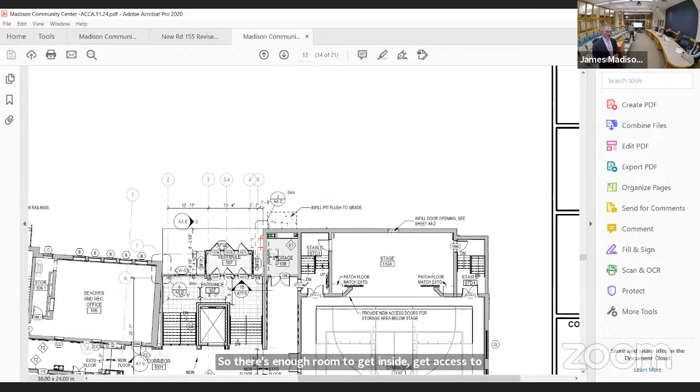We did also change on the elevation, the cornice to this connector. And if you could go back to the rendering.

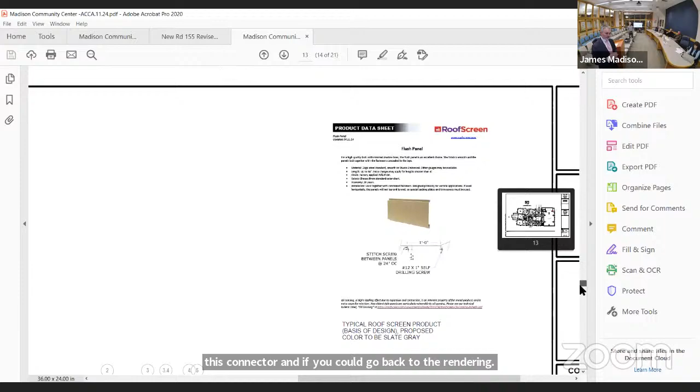Question: roughly, what's the dimension of that vestibule for scale? Oh, go back, scroll back up. One more down. Awesome, yeah, just scroll to the next page down. I know, right? Trying to preserve your time.

So there's about 7 feet clear. It's minimal. The code requires you have 4 feet from the end of the door open to the other jamb, so it's the minimum, for sure. It's just enough to serve its function.

I don't mind it the way he's got it. I mean, you know, that... It looks like you needed one and added it. Well, they had that problem. That's the way it looks. Well, they had the problem because they had to add it, but they... I know. But that big floating canopy kind of mitigates it, first of all, being off center.

How far out does that canopy go above that thing? It sticks out like another 5 feet, and then it comes in here. So why couldn't, instead of leaving the old building proud those however many feet it is, that little jog, if you connected that vestibule, maybe even made it a little deeper, and jogged it instead, connected it above that corner, if you went straight across.

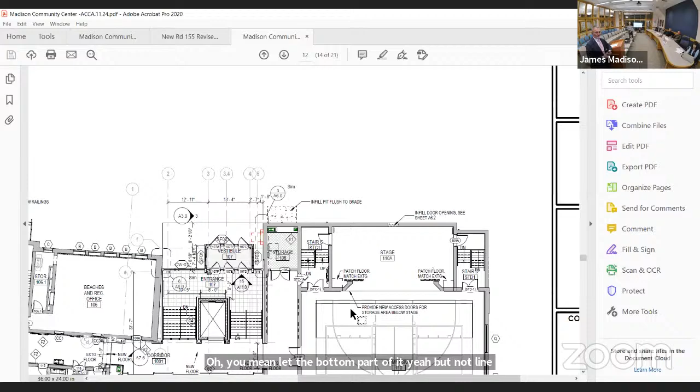Oh, you mean let the bottom part of it lap that corner? But not line it up with the building, but actually set it up in front of it. I don't mind it tucked in there, because that way it doesn't look added on. I don't mind it tucked in there. In fact, I'm sure you guys debated this internally.

However, what I would consider is not having it float, just having it connect over to the right. Get rid of that sidewall on it. Just let it sit in the corner. It's off center, but so are the 2 bookends you have. I think that's an easier resolve, it simplifies it, and makes that thing sort of less important because it's not out there by itself. It keeps me from getting screamed at by Public Works for all the junk that goes in there they can't get out. Yeah, it's gonna be dirty. I think if you just let that thing close against the other building, I think that'd be clean. Could do that. That'd be better.

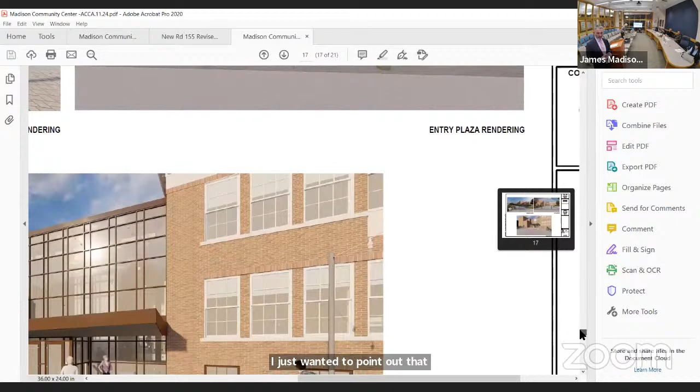Real quick, I know you're running out of time. The exterior elevation, Maria, which was the renderings at the end. I just wanted to point out that we had... maybe this one up here is fine.

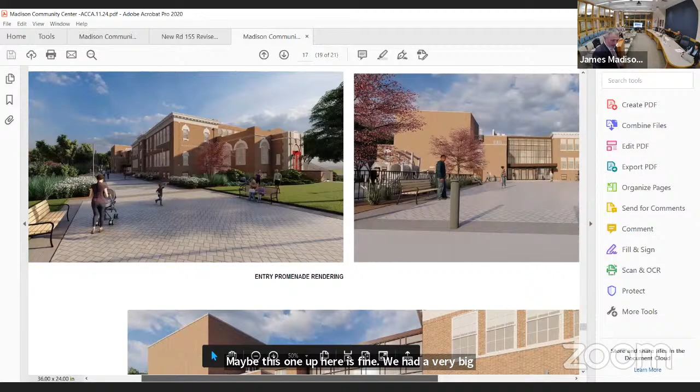We had a very big parapet, very tall parapet. We dropped it down and made it even with the adjacent building there, so that this parapet turns the corner, goes out. It has to be reconstructed, but it'll preserve that corner, actually reinstate that corner of the original historic building. So, I think this is a nice solution. It's progressive, but it really creates a true demure hyphen and lets the original building really stand out.

Aside from that, architecturally, the only other things we added were some samples of the insulated glazing, which is in the curtain wall. And then the spandrel glass, which I had an example of, will be mirrored and match the color of the frame.

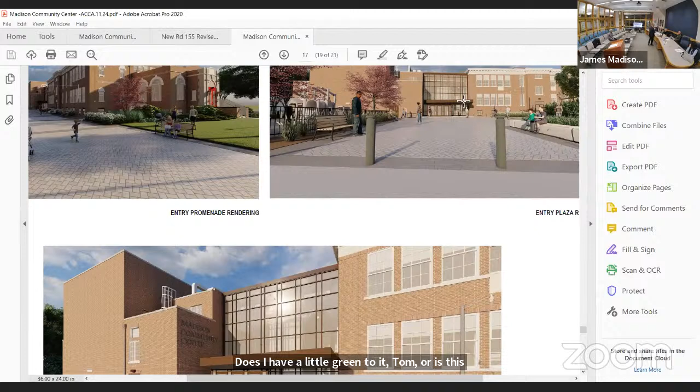There really aren't a lot of materials on the building. It's just the windows, the curtain wall, and then all of the existing gets restored to its original nature. I think it looks terrific. Does that have a little green to it, Tom, or is it just something we're picking up in the room? I think it's picking it up as the light comes in. That's fine.

Here is the dark aluminum, and all the exterior finishes will be the same. You can see it really complements itself.

So I appreciate your input. I know you have a lot going on.

We can talk about being back here in December, after a referral from P and Z. I don't know when our public hearing would be. It was just brought in today, so it gets received at the meeting, the first meeting in December. So because it's a public hearing, I guess it probably will not be heard until this is coming back to the 19th. Yeah, we'll see.

Because the application just came in this afternoon. No, it's good though. So it'll be received on the 5th and the public hearing is probably more than likely December 19th. And then you'll have to go to historic in December. So you have time to.

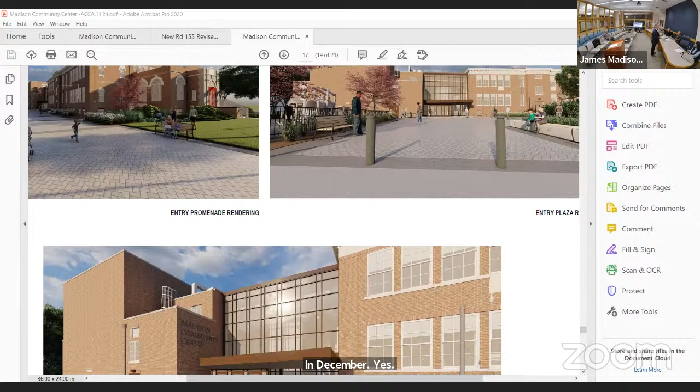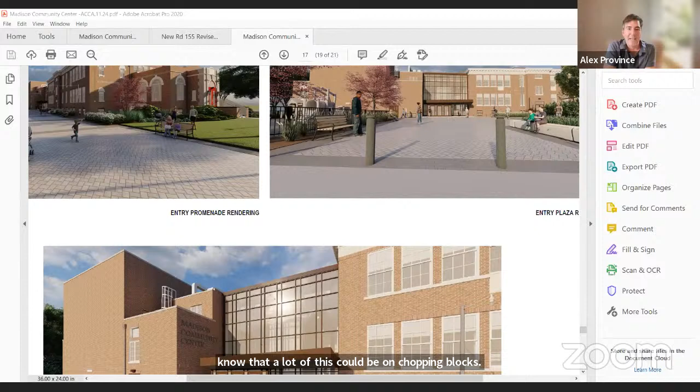So this is a question for Matt. I follow this stuff along closely, Tom, and I know we went out to bid and we're hoping for stuff back on December 2nd or whatever. How many things are we looking at that could potentially be value engineered and become moot points? If we're giving our opinions on stuff, but we know budgetary restraints mean a lot of this could be on the chopping block. Will we as a committee get a chance to review any changes that end up coming from what we hear back from bidders? I would say yes.

I don't think Maria's going to run them through modification of special exception unless the scope of it changes. But I think if there are changes to the material selections and any other kind of building form, that's something they would probably need to bring back. Yes, if there are major site changes, then yes, we have to go back. Or major architectural changes in the zoning.

I think it's almost impossible to speculate without knowing what they would be. For example, some things look expensive but they're beautiful. Is that something that could get changed back to something we did not like if we don't have the money for it? We'd have to review it.

Fortunately, I would say we're going to have bids in place prior to us coming to you again in December, so I'll be able to tell you what we're doing. I can inform you the town's plan is to see where the bids come in and then potentially go back to referendum to address any budget shortfall, because there's a lot of grant dollars. They'd like to apply some of those grant dollars to the project, but they have to get permission so they're not increasing the referendum amount. If something changed significantly, we'd have to come back to you.

I can tell you for the building, there's very little we can change on the building. That would be VE because we're not changing very much. It would probably be, unfortunately, a site change if it was significant. But I can't comment on that other than we will know where we are when we come to you next.